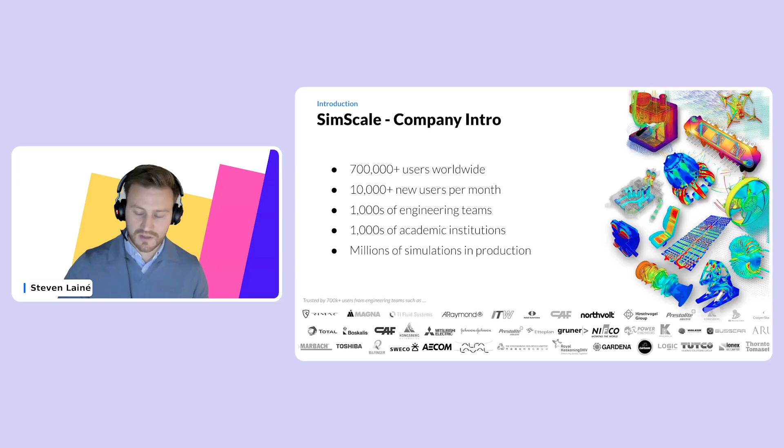So what does SimScale do as a very quick introduction? Well, SimScale helps engineering teams to innovate faster. And we're doing this by helping engineers to explore thousands of design decisions in seconds. And I'm going to show you how that's possible. There's about 700,000 users of SimScale worldwide, and it's being used quite extensively throughout the globe. I'm not going to spend too much time on this. Let's get to the meat of it.

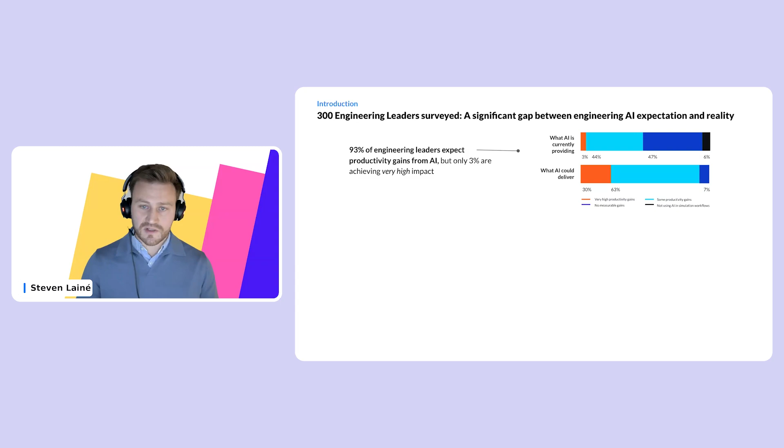So, as others have mentioned, there's a significant gap between engineering AI expectation and reality. So we surveyed 300 leaders recently, and 93% of engineering leaders expect productivity gains from AI. However, in the survey, we found that only 3% are achieving a very high impact from actually implementing AI.

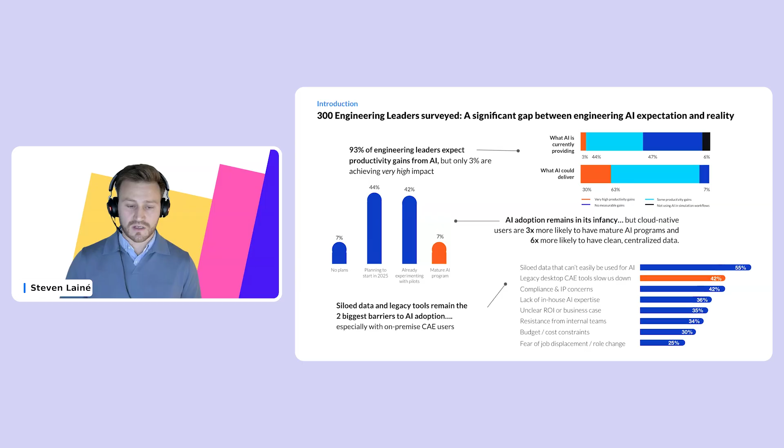AI adoption is definitely still in its infancy in engineering, but cloud native users are 3x more likely to have mature AI programs and 6x more likely to have the clean, centralized data source that they need to be able to leverage AI effectively. Siloed data and legacy tools remain the two biggest barriers to AI adoption, especially with on-premise CAE users. So, this goes back to the idea that that data isn't accessible, it's siloed, and can't necessarily be used for AI.

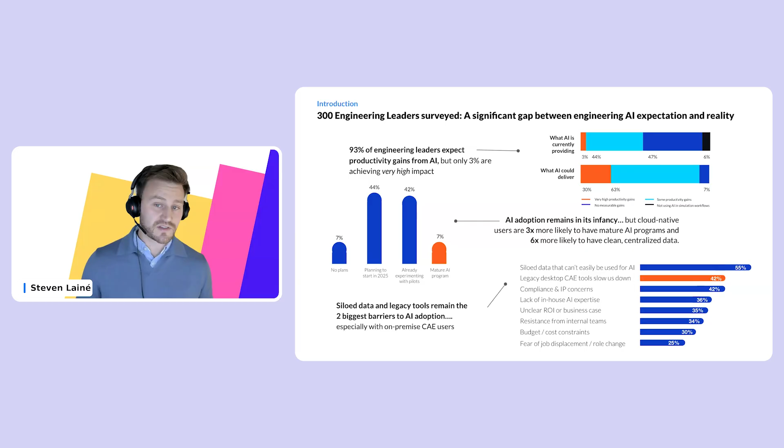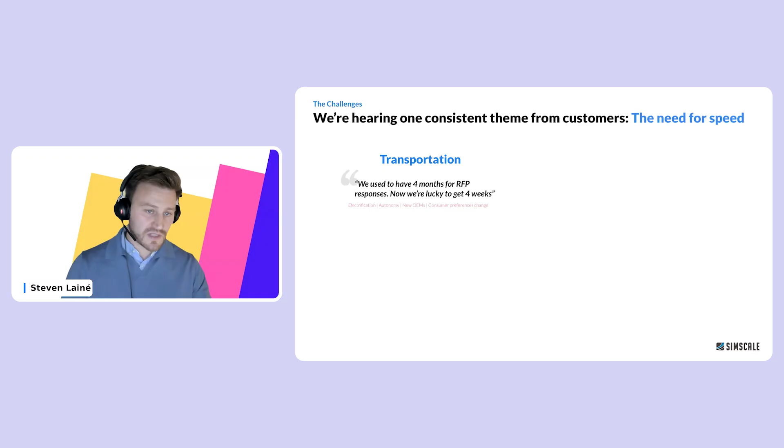And something that we're hearing generally in the industry is that there's a need for speed. So in the transportation industry, we're typically seeing that transport companies are being pushed to respond much faster in the supply chain to RFPs, where maybe they used to have 4 months. They're now lucky if they have 4 weeks of time to respond to an RFP, and they need to do a lot of the technical work in the response. So, this really goes back to the example that Moritz demonstrated as well.

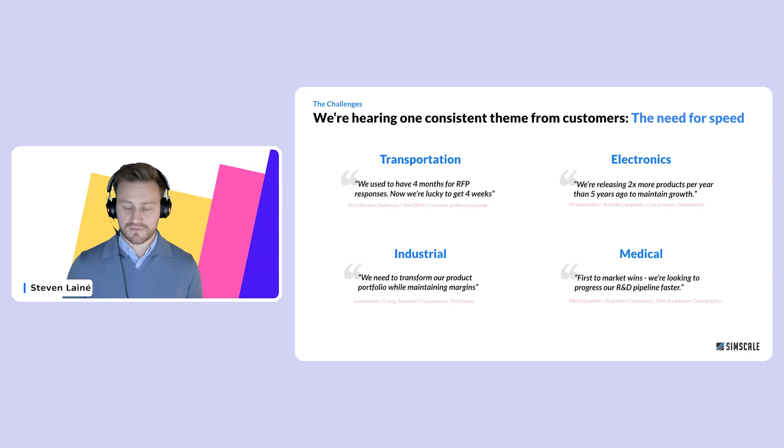The electronics industry needs to release 2x more products per year than they did 5 years ago to keep up with the competition and maintain growth. And in general industry, they need to transform their product portfolio while maintaining margins. And in medical, it's the first one to market that wins. So all of these need faster innovation. And this is why we're seeing a need for speed.

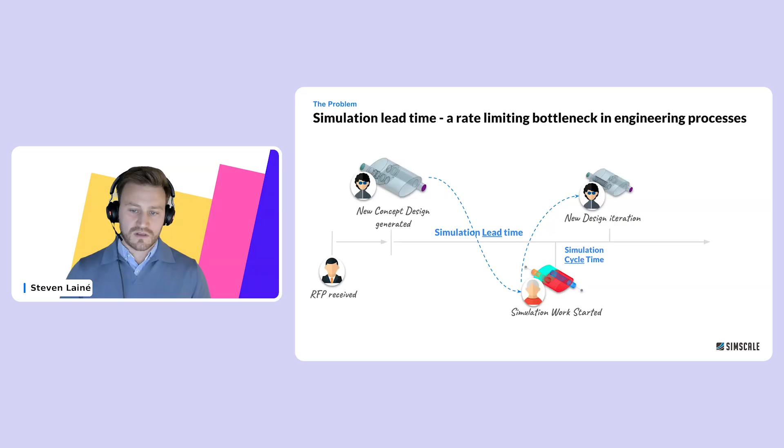So the traditional workflows create a bottleneck here. There's a simulation lead time. So imagine an organization receives an RFP. They then start technical work and generate a design concept. That design concept gets passed to the simulation expert to start simulation work, and there's a delay time there. They make some recommendation, there's a new design iteration, and maybe a final simulation validation. In a certain space of time, you only have time for maybe 1 or 2 design iterations with this traditional process, because there's a lot of waiting happening, just like Moritz was saying. So you may issue your proposal just in time.

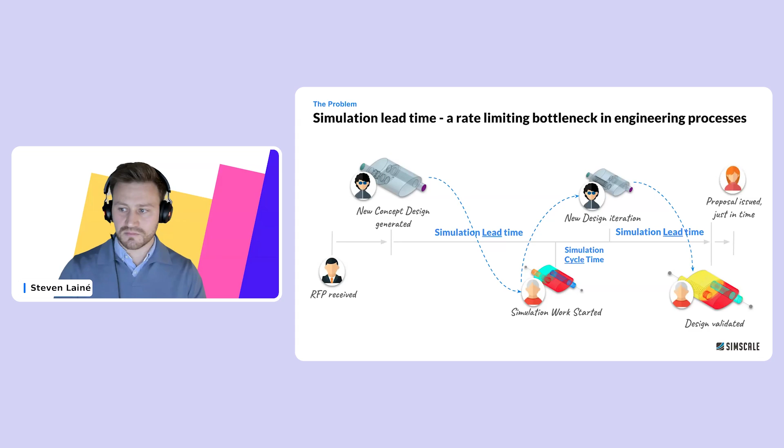Now, if we look at the approach that we can implement, if we accelerate this with physics AI, then we can do many more iterations in the process, because we're putting inference in the hands of the designers so that they don't have to hand off to a simulation expert. They can either run full simulation, or they can iterate even faster and do thousands of iterations if they use inference. So the inference enables these very rapid predictions of results, and they can iterate through many, many more designs in a given time. So that's, in SimScale, what we're calling physics AI, and that's accelerating the simulation process. And physics AI is nothing new. There's many companies implementing physics AI.

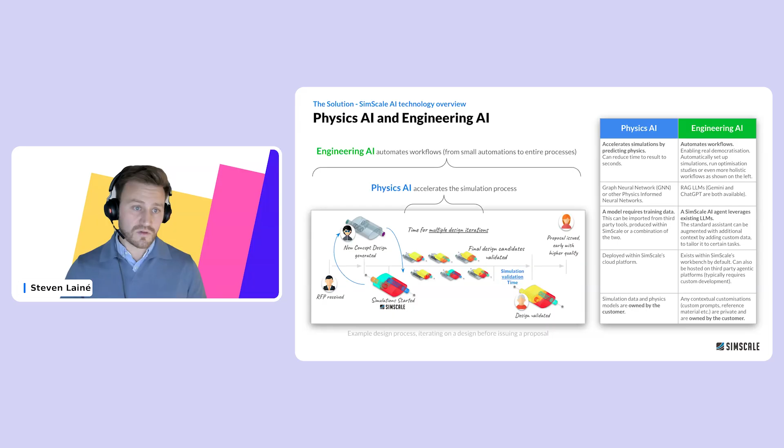What's a bit newer, and we're in the age of agentic automation, is the engineering AI side of things—the multi-agent workflows, the automation of that whole process. With engineering AI, you can work over the whole process: look at the RFPs coming in, use LLMs to understand those RFPs, compare data you've built up in a library over time of different RFPs that have been responded to, start to build engineering ideas, and do inference against physics AI models you have. Where physics AI models aren't available, you run full simulations and feed that data back into the physics AI model. So we're really seeing the need to implement these full engineering AI workflows now.

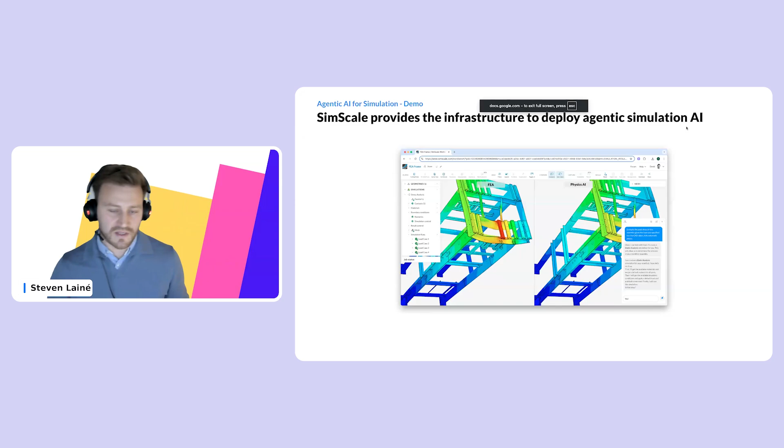Let's focus a bit more on engineering AI for a moment. With engineering AI in SimScale, it's very similar to what Moritz was explaining in Synera. Where does the data actually come from? Well, we're using LLMs, so there's no need to do direct training. The agent in SimScale comes ready out of the box to understand simulations, understand high-level questions, and help with the setup. You can augment the agent with your engineering data—past examples of simulations, standard operating procedures, documentation from the PLM system, etc.—so it has additional context, but that isn't necessarily required; it already understands out of the box how to run a simulation. That can enable many other workflows to be triggered just by running the agent and using physics AI in the background to do inference, etc.

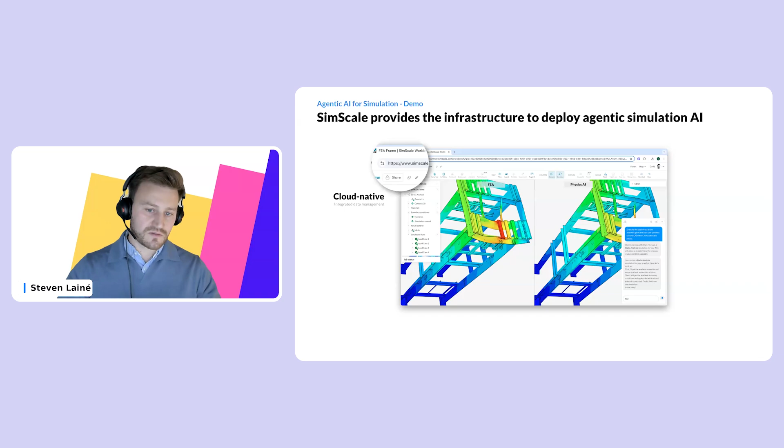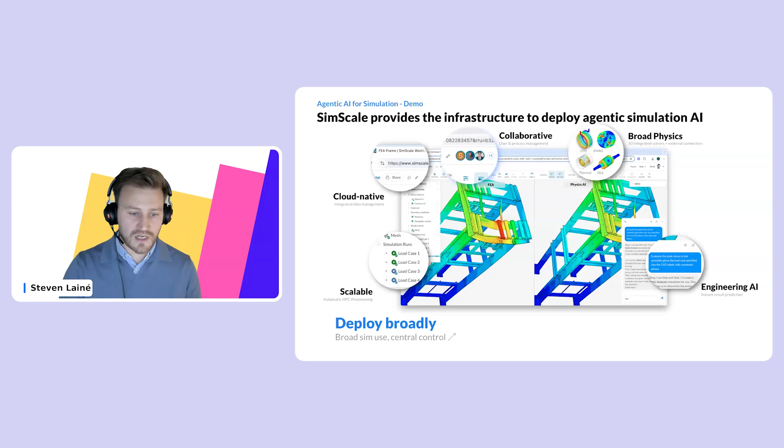In SimScale, we're doing all of this in the cloud, and we believe quite strongly that only a cloud-native platform can deliver a full end-to-end simulation, physics AI, and engineering AI solution. With SimScale, everything is on the cloud, so it's very easy to access, create training data, publish models, and work in the cloud. There's broad physics capabilities, everything's scalable, and it's a collaborative platform. You can deploy anything you create, physics AI or engineering AI, very broadly. You can automate workflows and accelerate the design so you can do many more iterations in a given time period.

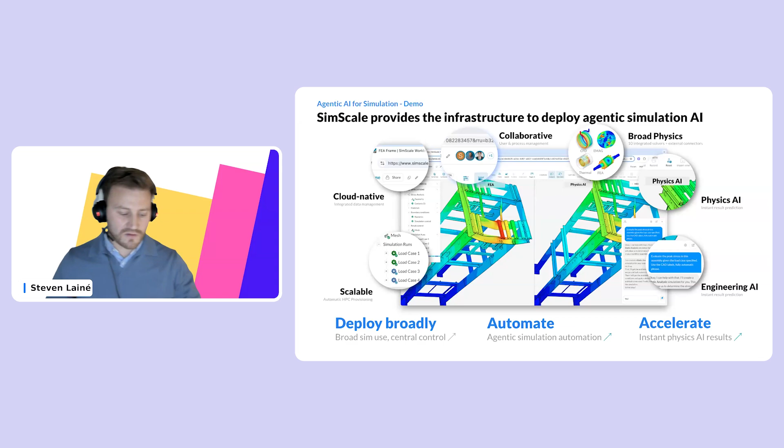So that's a super quick overview. I don't want to spend too long on that because I want to get into the actual platform now and show you how this works.

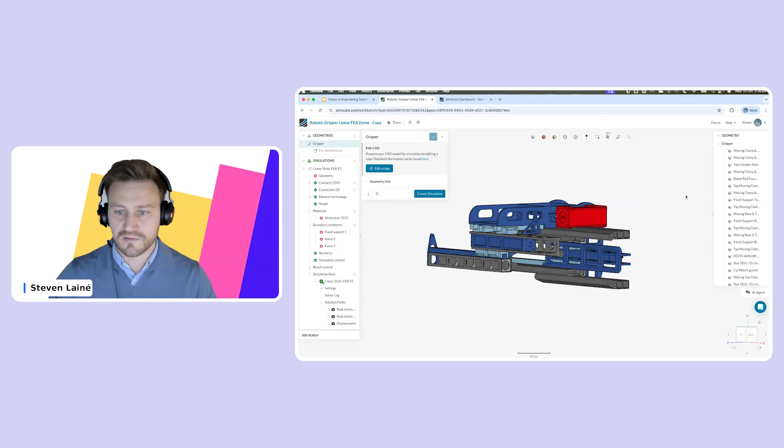So I've got a structural analysis of a robotic gripper assembly here where we've performed a static structural analysis. Imagine that I'm an engineer now and I'm coming in to pick up the work here. So I can use the agent directly in the platform here.

So I can speak with the agent and say, hi, I need to run a frequency analysis. The agent here is able to talk with us and help us through the simulation setup. This is an example of a simulation specialist agent. Now, the agent we're using here is completely out of the box—I haven't provided any additional context. So this is exactly what you get in the vanilla implementation. You can see the agent has set up a frequency analysis; we can see in the tree structure it's created that here for us. And it's asking if we want it to proceed with the setup. So yes, let's go ahead.

Set up the analysis, assign aluminium to all parts, and fix it at the saved selection—and it's fixed. So it can give some basic instructions of how it can do the setup. Now, we have to give quite a bit of instruction at this stage because it's obviously an out-of-the-box solution; it doesn't have much additional context. It doesn't know maybe that we always save the saved selection as a face name where it needs to be fixed, it doesn't know what materials we normally use, but all of those things could be provided as standard additional context. So now I'm completely hands-off, and the agent will go through and do these setup stages for us.

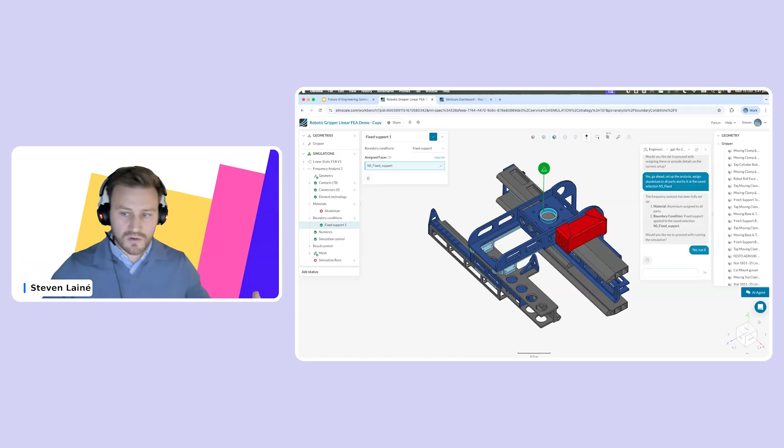So it's saying it's done the setup, proceed with the simulation, yes, run the simulation. And then it will go away and actually run the simulation, and we'll get the results back in a moment. We can get the agent to publish those results into standard business tools as well. So the options are endless for how it can actually integrate.

So that's an example of out of the box, how it works. But what if we then want to configure some agents? Well, we can go to our agent section here, and we can actually set up additional context for specific specialist agents in SimScale. So I have a Valve agent example here where we've got some instructions defined to the Valve agent, how we normally calculate the CV value of a valve.

Let's have a look at this as an example of how an agent with additional context can work. So this is kind of the first level of customization for setting up an agent. So it's exactly the same workflow, but I go to run a new agent and I select the Valve agent from here.

If I greet the agent, it has been pre-configured to give us all a greeting. So it welcomes the attendees of the Future of Engineering Summit, and it gives us a quick joke. You can read the joke for yourself. I'm not going to read it out myself.

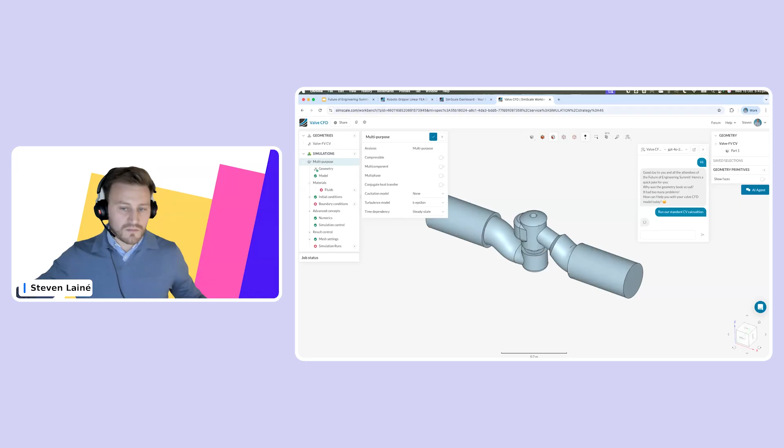So this is the first level of customization, and we're working with many organizations now to build much broader workflows, also engineering AI workflows that run from outside of SimScale, call the specialist agent to do simulation setups, analyze RFPs that are coming in, use an LLM to extract the requirements from that, and start to do the actual engineering work for us.

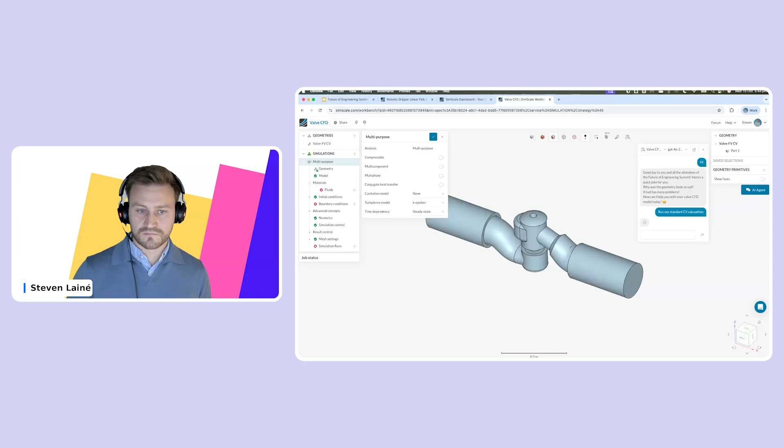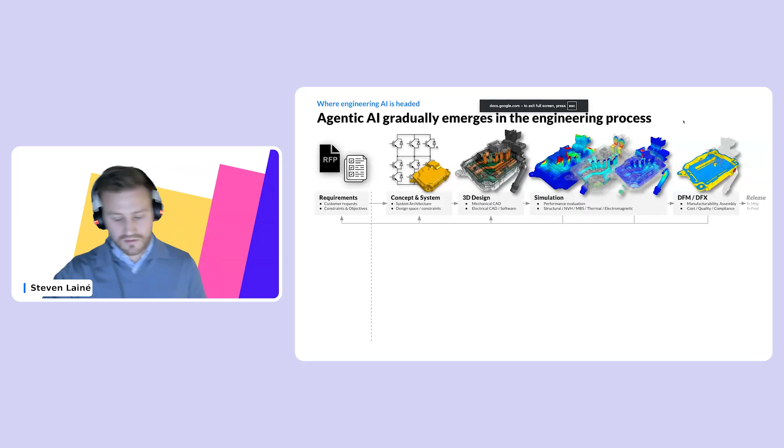All right, just looking at the time, I'm just going to give it a few more seconds to do that assignment, and then I'll jump back to the final slide and give a quick summary. Here we go, it's doing boundary conditions, etc. You get the idea.

So just as a final closing slide, this is an example of the sort of implementation that we're currently working on to take in those requirements and go through all of the necessary steps with exactly the sort of architecture, as Moritz was saying in Synera, having an agent orchestration layer to control everything.

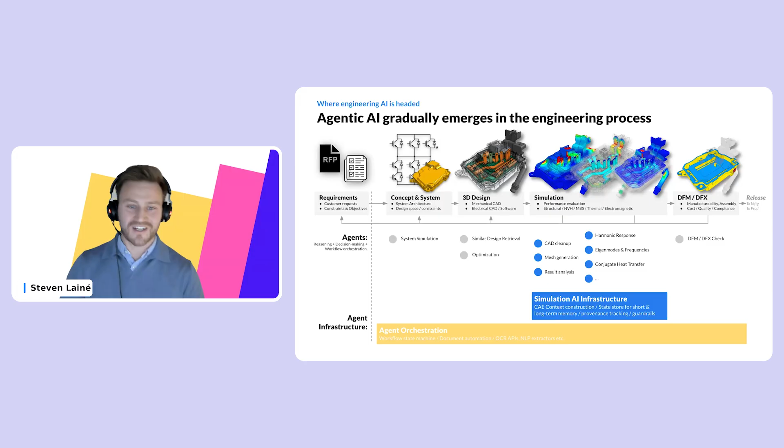All right, thank you. Awesome, Steven. Thank you so much. It's always a bit of a challenge doing a demo live while on Zoom, especially because I think somehow Zoom changes the way that the computer processes visually, and so it slows things down every single time.

But I've always been impressed by SimScale. I feel like it's free preparation for machine learning every time you run a simulation. It's a great way to get things started. So we've heard now from the generative design side, the agentic AI side through Synera, the PLM side through Michael, and the simulation angle through Steven, and how that helps the training of AI.